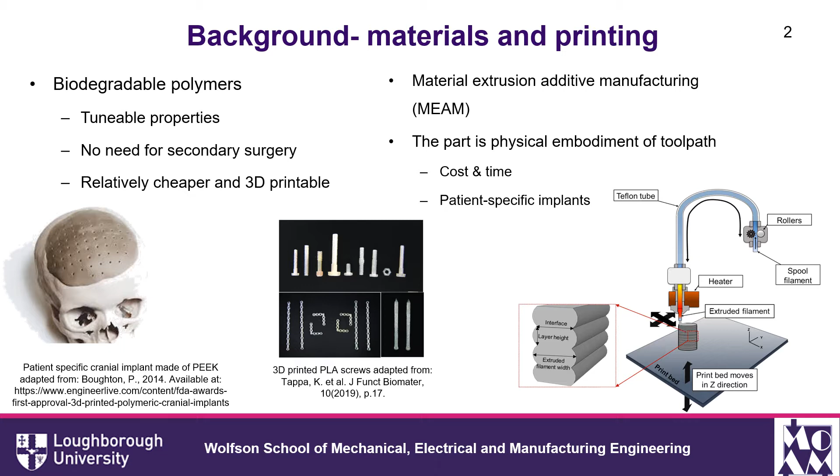MEAM, which stands for Material Extrusion Additive Manufacturing, is one of the most commonly used technologies for fabricating parts out of biodegradable polymers. In this technology, the filament is fed into the melt chamber and then deposited onto the print bed layer by layer. It has been shown that additive manufacturing saves development costs and time significantly, as well as enabling us to produce patient-specific implants and intricate and complex parts, which is not typically feasible using injection molding technology.

However, this layer-wise strategy normally results in the main limitation of MEAM parts, and that's anisotropy, or more specifically, the weakness between extruded filaments as shown by the blue arrows. In contrast, when the filaments are laid down in the direction of the tensile testing load, as shown by the green arrow, they're known to be stronger. Therefore, in this study, we decided to consider the weakest part by building our tensile testing specimens in the vertical direction. More information about anisotropy and interlayer weakness will be given by my colleague James Allum, so please refer to his presentation.

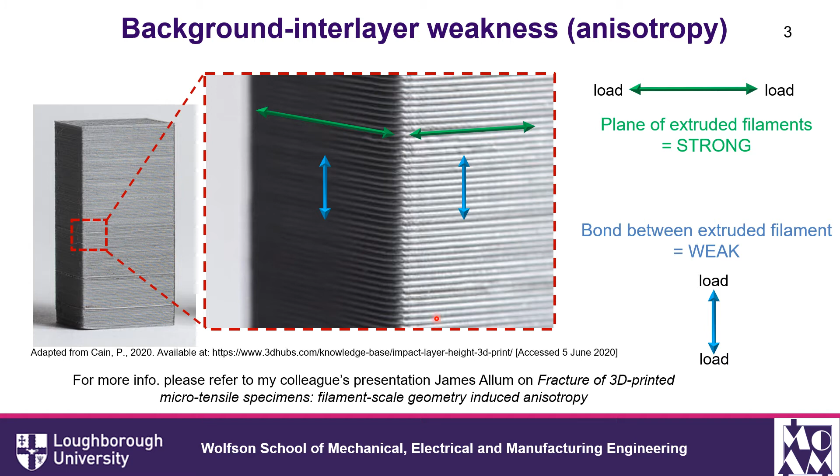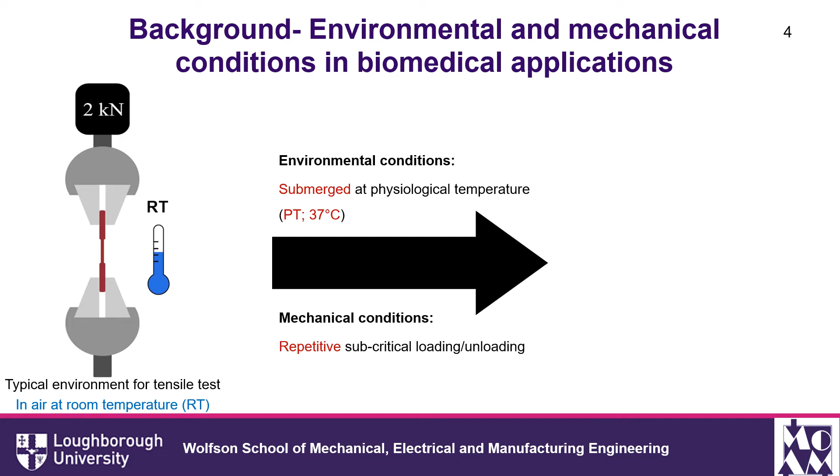Other than considering the effect of the manufacturing process on properties of biodegradable polymers, it's equally important to understand how the environment changes these properties as well. However, we found that many studies in the literature still consider tensile testing in air at room temperature, whereas in vivo, the medical implant is more likely to be subjected to cyclic loading, as well as being submerged at physiological temperature, i.e. 37 degrees. So in this study, we propose a correct assessment of medical devices by performing tensile testing submerged in water at physiological temperature.

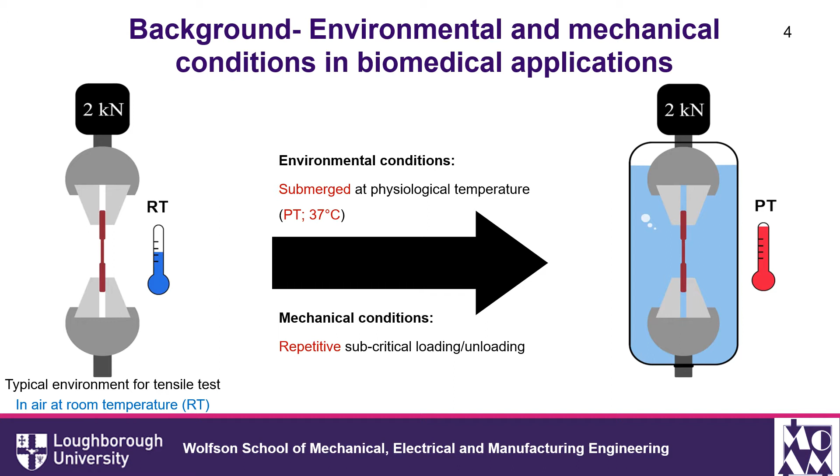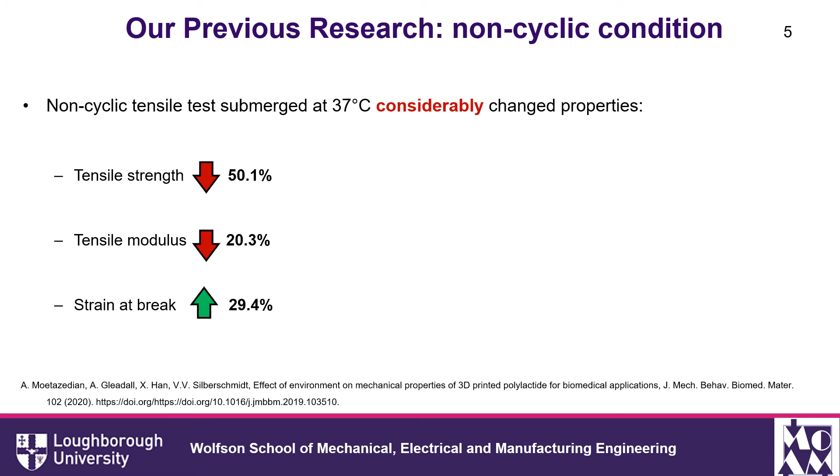One of the motivations for us to do this experiment was based on our results in previous studies. For non-cyclic tensile testing submerged at 37 degrees, we found a considerable reduction and changes in the properties. For instance, tensile strength and tensile modulus were reduced by 50 and 20% respectively. Meanwhile, the strain at break increased by approximately 30%. And we identified that the synergistic effect of water and temperature was responsible for the change in the behavior of the polymer.

Consequently, the aim of this study was to determine the mechanical properties of the 3D printed part, first by comparing cyclic and non-cyclic loading conditions, and then estimate the damage evolution of the 3D printed part when tested in air and submerged respectively.

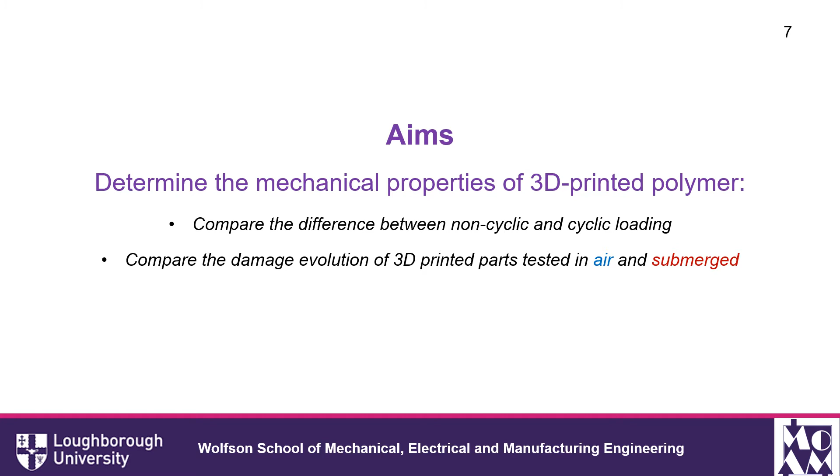To do so, we decided to print our own tensile testing specimens using custom G-code developed by us. The benefits of using custom G-code rather than ASTM standards are reducing thermal variation as well as geometrical complexity, which is normally associated with the ASTM standard. The printing parameters are shown in the table on the right hand side, and the schematic showing the toolpath for printing our boxes is here as well.

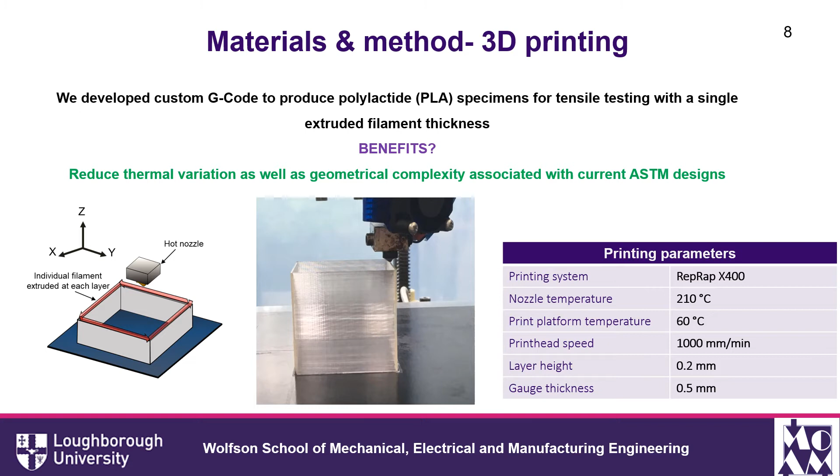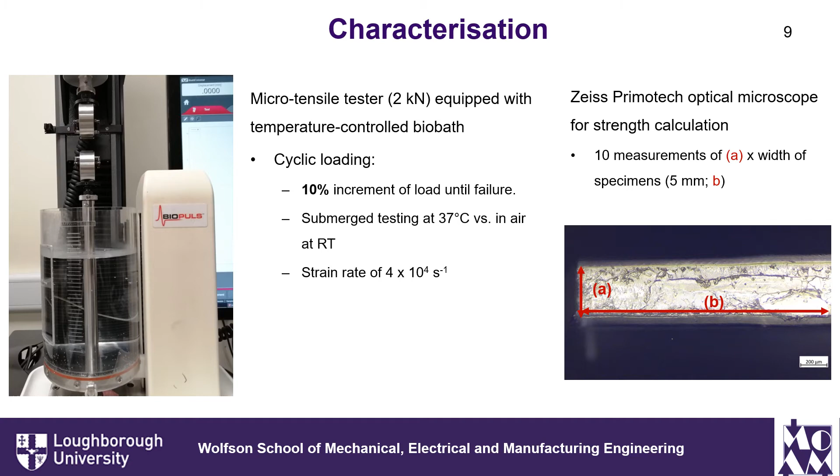The other benefit of using our tensile testing specimens is we can actually measure the true load bearing area for our strength calculation, as shown by the figure on the right hand side. Let's now move on to the cyclic loading results.

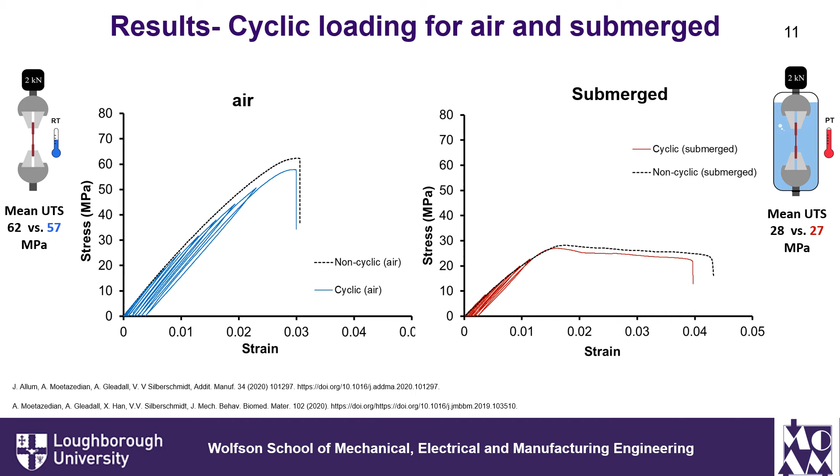On the other hand, for submerged testing, the reduction was negligible, as well as the cyclic curve followed the master curve, and this may have happened due to the differences between tensile environment. After that, we decided to analyze the stress strain curve more in detail. So we plot the energy dissipation as well as unloading modulus and damage evolution for both air and submerged testing.

We identified that during the first 4 cycles, the energy dissipation values were comparable. However, after the 5th cycle, submerged testing resulted in more energy dissipation compared to air. For damage, we identified that the values were comparable initially again, and then submerged testing resulted in sharper increase in the damage value, and at the end it was 18% more damage for submerged testing compared to air.

Other than that, we also identified a region of A, which was the overestimation of strain capacity for medical devices. And because of all these differences between these two testing environments, we decided to introduce new safety factor for designing medical implants. So we took the strength at room temperature and then compared against the strength at submerged testing. And then the adjustment was basically multiplying by 2. So we advise future study to use this new safety factor for designing medical implants of biodegradable polymers.

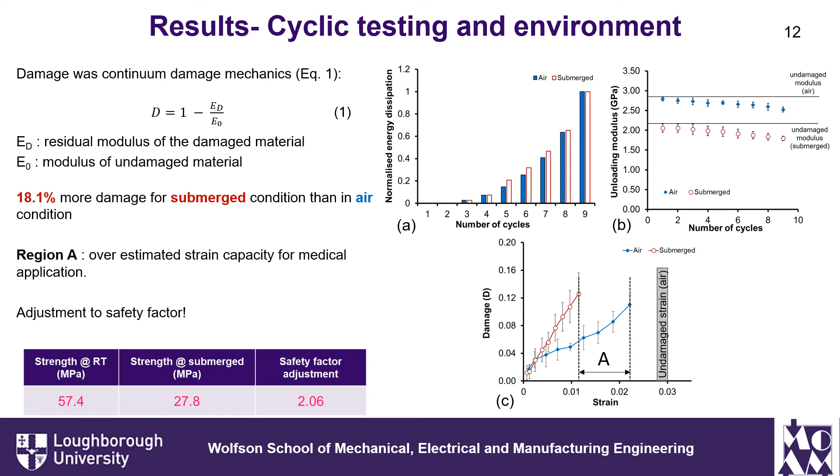And we can see some possible shear lips at the sides. These results are exactly similar to what we've seen for non-cyclic loading conditions. So we believe that these raised edges could be a microplasticity due to the interaction of water molecules with the polymer during its deformation.

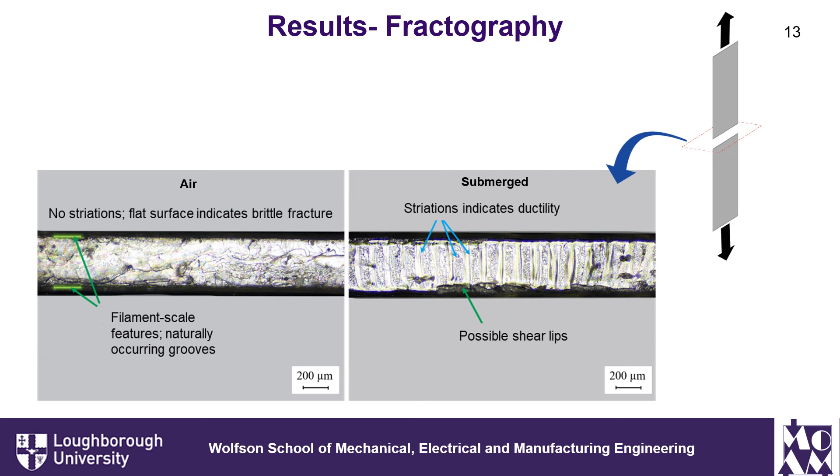To summarize our findings, we showed that tensile testing under cyclic and non-cyclic loading resulted in very little difference in terms of ultimate tensile strength and strain at fracture. So this information can be useful for people who design new medical implants. Furthermore, we showed that the correct assessment of polymer for biomedical application is important.

Specifically, tensile testing submerged at 37 degrees under cyclic condition resulted in more damage to be accumulated quicker compared to tested in air. So people should consider this for future study. And all of this information was only possible through our novel approach of using our own tensile testing specimens rather than using the current ASTM standards.